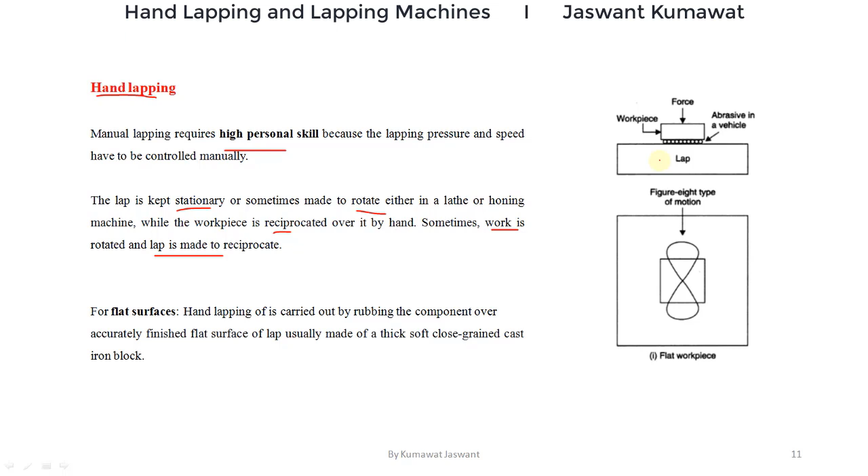Now for the lapping of external cylindrical surfaces, laps in form of rings are generally used. Here, this is the lap which is in form of ring, and this is generally made of cast iron. However, the smaller size laps can be made of steel or brass.

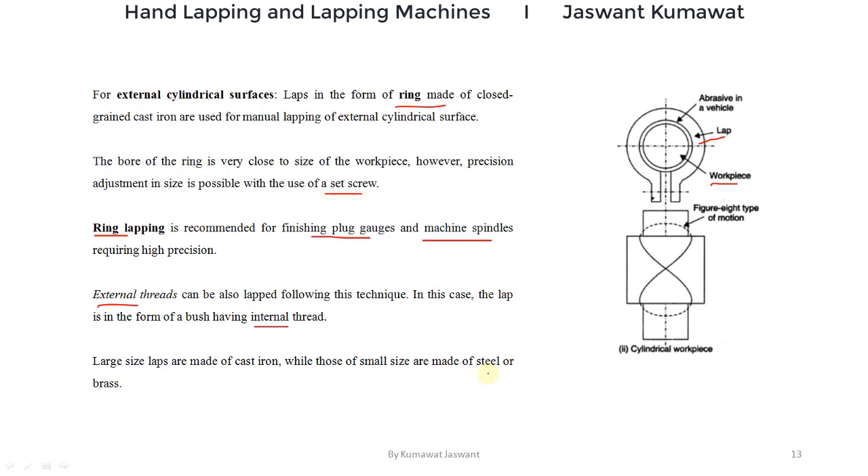For the lapping of internal cylindrical surfaces, solid and adjustable laps are used. These solid or adjustable laps have an accurately finished external surface on which lapping compound is applied, and then this lap is made to reciprocate inside the holes or bores. Here, the diagram shows the design of adjustable laps, and the first figure represents the lap with partially split sleeves with screw expansion device. Here, this is the sleeve, and on both sides of this sleeve there are bushes and the nut which can be used for altering the length of this sleeve. And this sleeve is held in the mandrel.

The second figure shows the laps with replaceable copper sleeve on the taper mandrel. Here, this is the taper mandrel, and it is covered by the sleeve, the surface of which is accurately finished. These solid or adjustable laps are used for lapping the ring gauges. As we have already discussed, larger size laps are made of cast iron, while those of smaller size are made of steel or brass. This way, we can do lapping of flat surfaces, external cylindrical surfaces and internal cylindrical surfaces by hand lap.

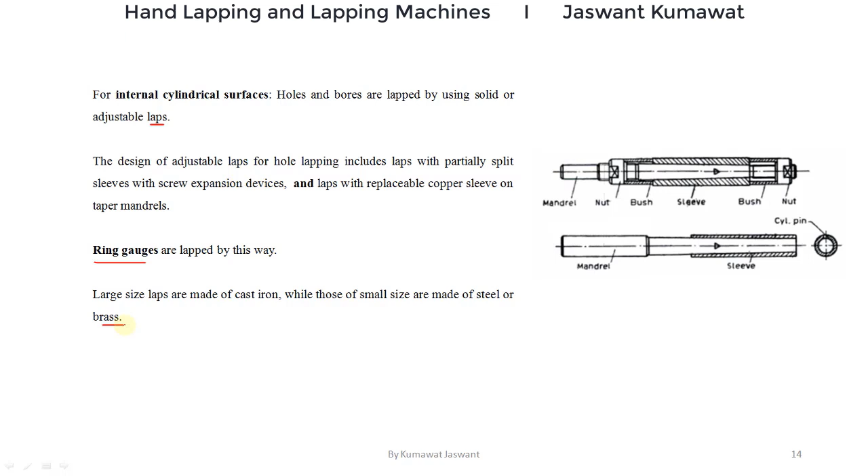Now, let's discuss the lapping machines.

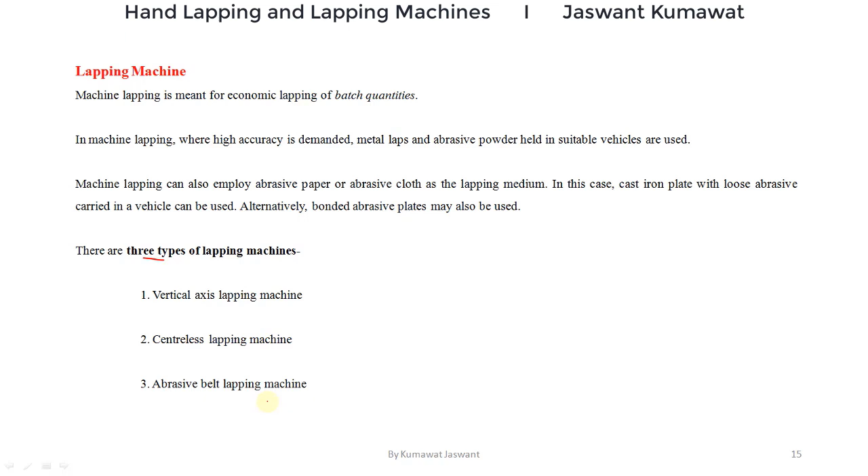Let's first discuss the vertical axis lapping machine. This is used for finishing the parts like plug gauges, piston pins, bearing rollers, and diesel injection valves and plungers. As the name suggests, this lapping machine has a vertical axis on which the lap and other components are mounted.

The first figure shows the production lapping of flat surfaces, and the second figure shows the production lapping of cylindrical surfaces. Here, on the vertical axis of lapping machine, the lower side has a guide rail and the workpiece holding plate on which workpieces are mounted and supported. And the top surface of these workpieces is to be lapped. And this is the lap. The lower surface of this lap is accurately finished and applied with the lapping compound.

The guide rail and lap are rotated in opposite directions. The speed, pressure and lap position can be controlled by the machine operator or may be controlled automatically. For the production of cylindrical surfaces, there are two laps, the lower lap and upper lap. Here this is the machine pan on which the lower lap is mounted. The top surface of this lower lap is highly finished and the lapping compound is applied on that surface.

On the top of this lower lap, there is the work holding plate. The workpieces are mounted on slots on the work holding plate. So these cylindrical workpieces are held and supported in these slots. And this is the upper lap. The lower surface of this upper lap is highly finished and the lapping compound is applied over that surface.

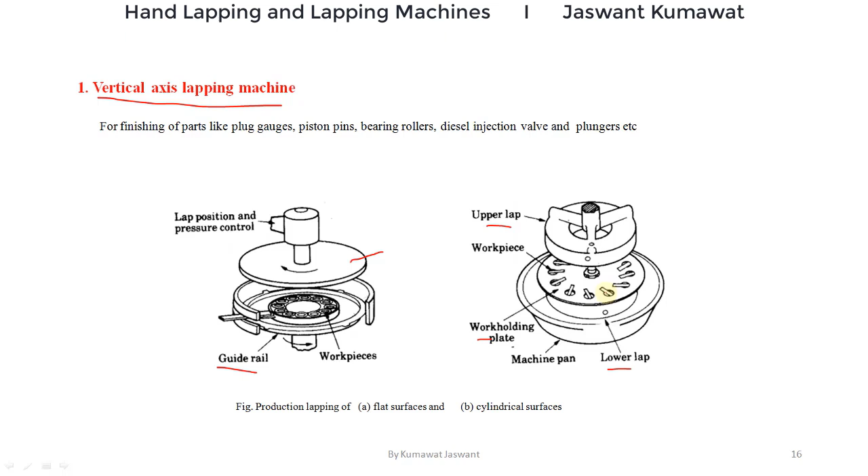Now the centerless lapping machine. This machine is similar to the centerless grinding machine, and it is used for finishing parts like plug gauges, measuring wires and similar straight and taper cylindrical objects. That means the centerless lapping machine can only be used for cylindrical objects. The centerless lapping machine has two rollers. This is the smaller lapping roller and this is the larger lapping roller. The larger lapping roller acts as regulating wheel and both lapping rolls are rotated in the same direction.

And the workpiece is kept in between these rollers, and there is a suitable arrangement by which this workpiece can be reciprocated between these rollers. And this hold down support makes the workpiece give proper contact to the abrasive. For lapping, these rolls are applied with lapping compound having finer abrasives, and then these rollers are rotated in the same direction while the workpiece is reciprocated between them and also rotated in the opposite direction to that of these rollers. This way, centerless lapping can be done on centerless lapping machines.

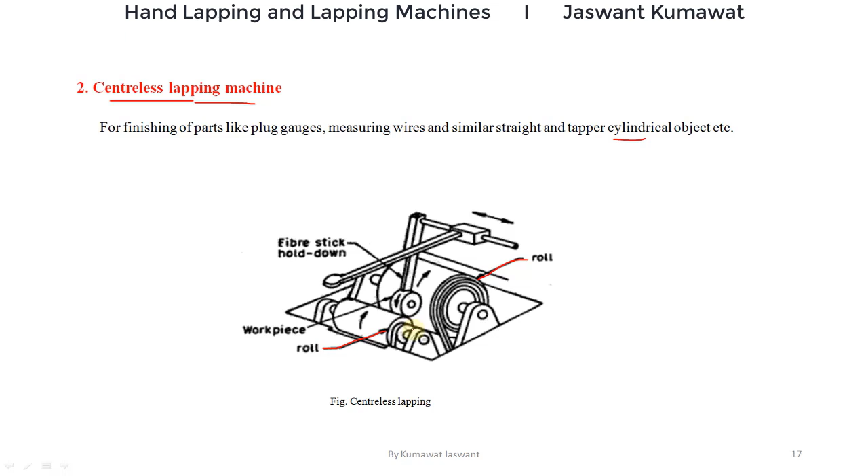Now the abrasive belt lapping machine. This machine resembles the abrasive belt grinding machine. This machine consists of two pulleys, in which one pulley acts as idler pulley and the second acts as driver pulley. And the abrasive belt is kept over these pulleys and is moved by rotating them. Here this is the platen, which is used to support this belt as well as the work. On the abrasive belt, lapping compound is applied, and if only abrasive cloth or abrasive paper is used, then there is no lapping compound used.

During lapping, the workpiece is kept over this belt, pressed against it and can be reciprocated over it. This way, the lapping of the work surface can be achieved by using abrasive belt lapping machines.